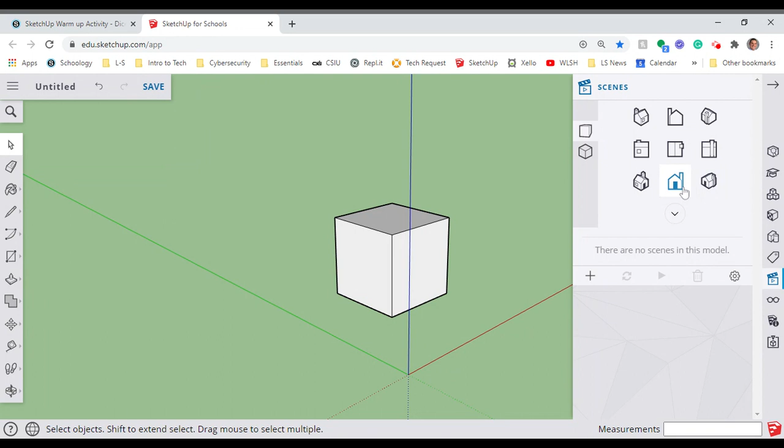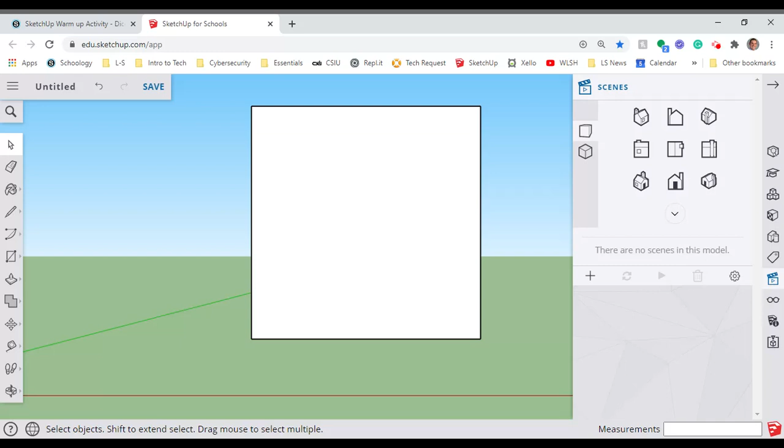If you don't already have it up, click over on the right on scenes, and click the front door of the house. Notice it's going to snap my drawing to that view. Now I'm using my scroll wheel to zoom in a bit, or two finger drag up and down on the screen, though it's pretty sensitive. I'll use the H key to hand position it so I can maximize my workspace. If your screen is small, minimize things to get more real estate to work with.

Okay, so on this side of the dice, we're going to put the one. That just that one single hole, and this is a great place to start.

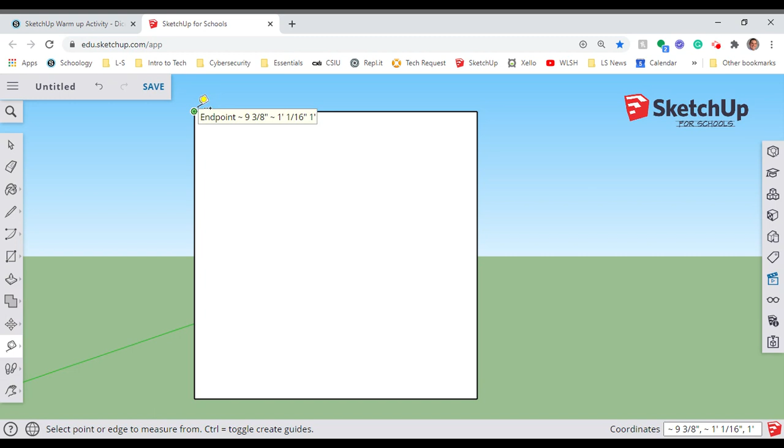There's another hotkey called the letter T for tape measure. With a tape measure I can measure things. I could click in the corner and come over to here, and at the bottom it's going to tell me how long that line is. It says that's one foot. Great, that's what I wanted it to be.

We can also use it to create guidelines using the tape measure tool. I'm clicked here in the top left-hand corner, going to the bottom right-hand corner, and I click. It gives me this dotted line across the screen, and that's a guideline - it isn't going to print, it's not really there, it's just going to help me lay stuff out. I'm going to do the same thing the other way, click, and now I've got an X marks the spot - there must be some buried treasure right there where those two guidelines intersect.

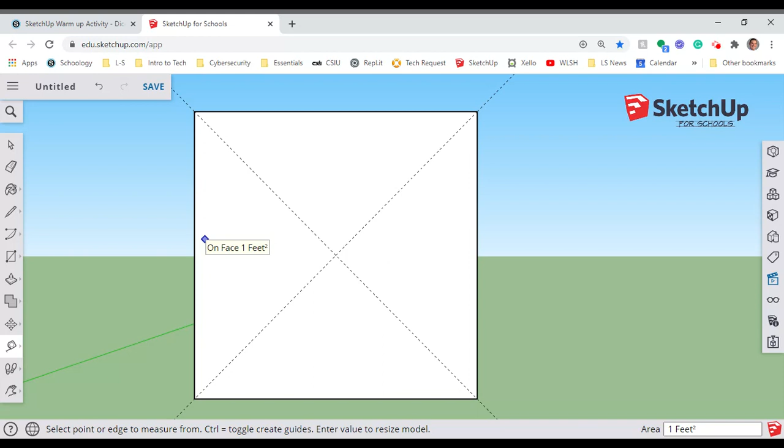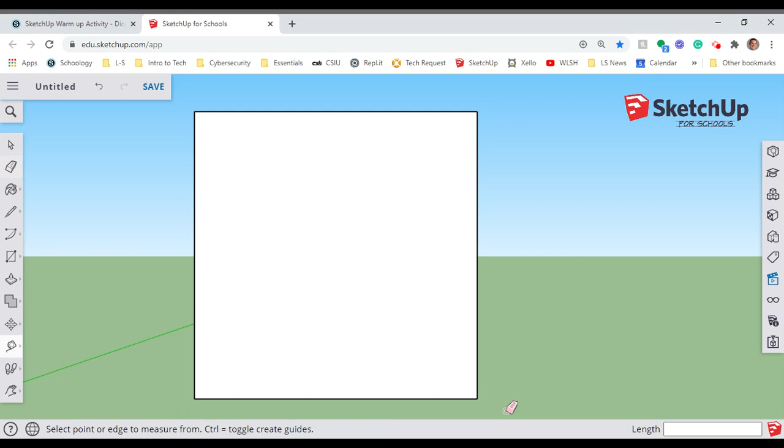Just an instant replay there: T for tape measure, and I just clicked and dragged. If you goofed it up, another hotkey - hit E for erase - and I can delete out those guidelines and they're gone. So if you mess that up, you can delete them and try again. So again, just T, click and click and click. There we go, I've got my X marks the spot.

If you've played board games with dice before, we're gonna do the one, and basically the one is just a little circle there in the center. By doing this, I know exactly where the center is.

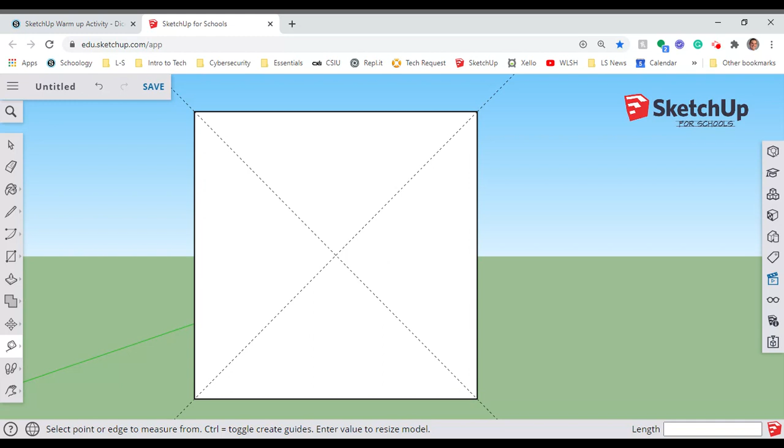So another hotkey - I want to do a circle, and the hotkey for a circle is the letter C. I'm going to click right here, which helps me snap right in the middle by having those guidelines. I click there in the center, and just start to move my mouse. Not like with a rectangle where I'm clicking and dragging - I've just clicked in the center to say be in the center, and then I'm just moving my mouse across the screen.

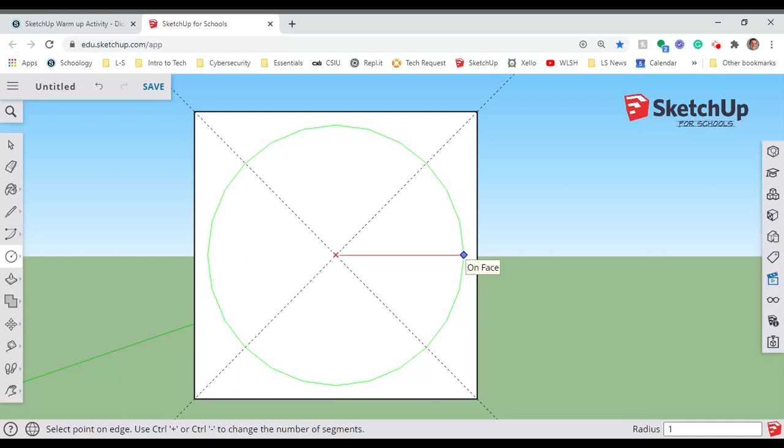So what size do I want this to be? We'll make this simple - I'm going to hit 1, and it's going to give me a 1-inch radius circle, which if we measure it with the tape measure T, should say 2 inches. When we're typing that in, we're doing radius, so 1 inch radius is a 2-inch diameter circle. Awesome. I'm just going to escape and get out of that.

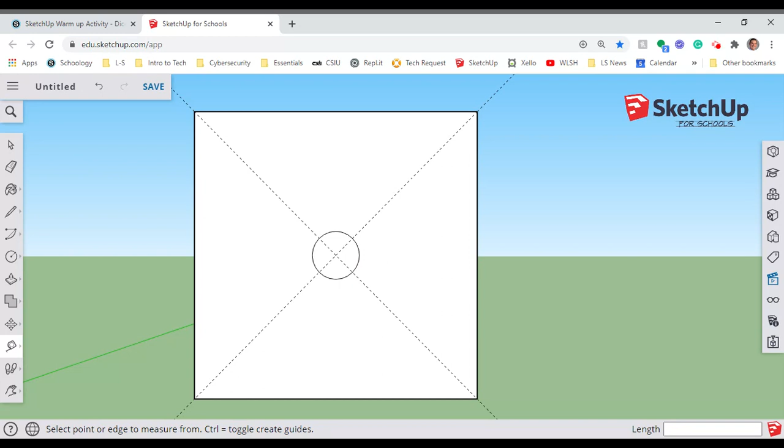I'm going to use the O for orbit tool and just orbit this a little bit, put it at an angle so we can see this better. What I want to do - if I was to print this on a 3D printer at this point, we would just have a solid cube. These guidelines would not print, and this little line for that circle would also not print - there's just nothing to show up. So I need to create some depth differences for us to see it.

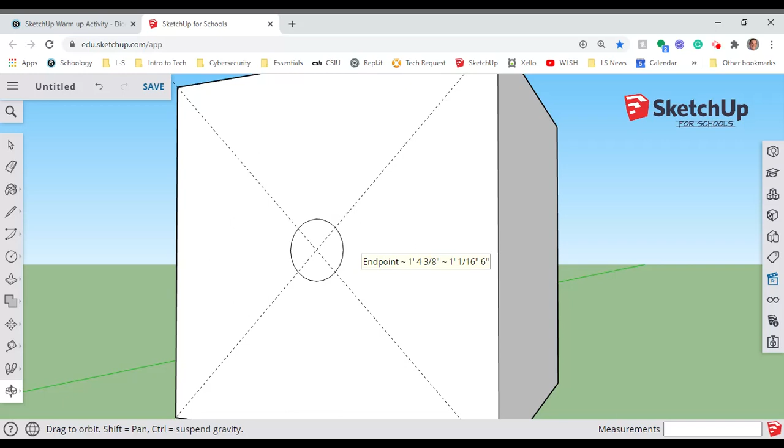So I'm going to use the push pull tool again, the letter P for push pull. I could push this circle outside in or out. I want to click on the circle, and again I'm not clicking and dragging, I'm just moving my mouse. It could come out, but that's not how a dice really looks - they're really dimples, they go in. So I'm going to move my mouse back so this pushes in as opposed to pulls out - I want to push it in.

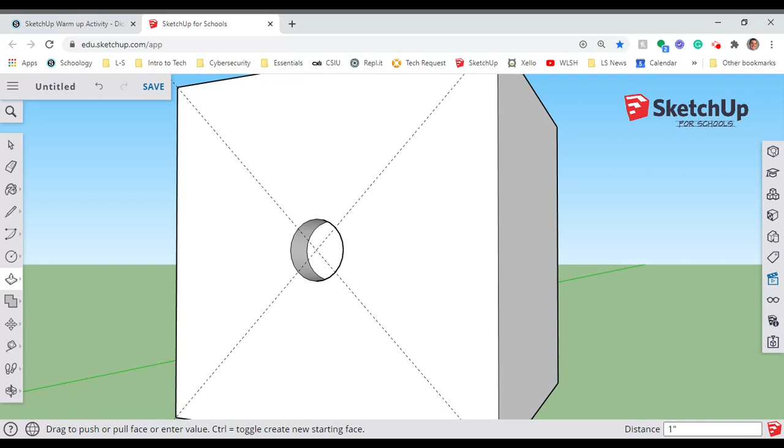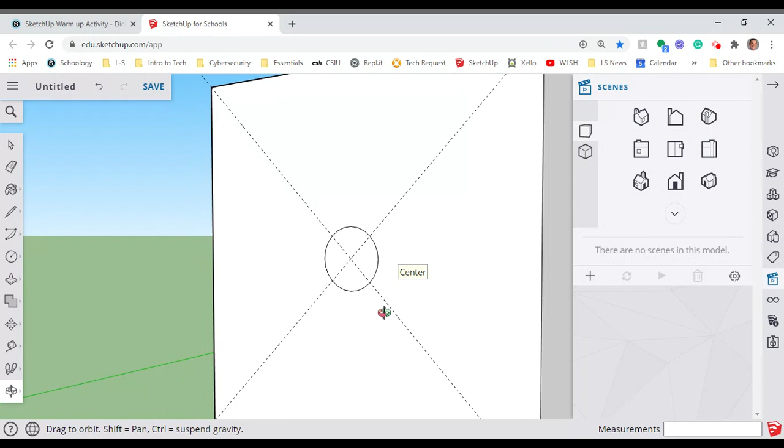I'm going to hit 1 and just have it be 1 inch deep - that's probably a bit extreme for what we're working on, but it makes it easy to type in. If I press O we can orbit around and see it's definitely got that indentation there, and that push pull tool is so much easier. Let me just undo that - if you're looking at it straight on, it's really hard to get that thing to go the right way. So I always orbit my object a little bit; you don't have to do it much, and it's much easier to grab it and push or pull it the way you want. I pushed it in, one, enter, and I've got my 1 inch dimple there.

All right, so that's how we make the one side of the dice. Give that a try, and I'll see you in the next video.